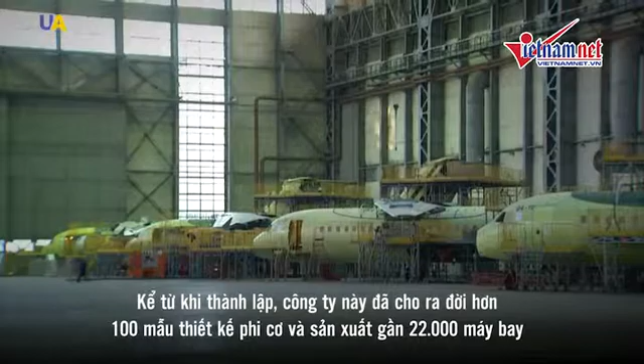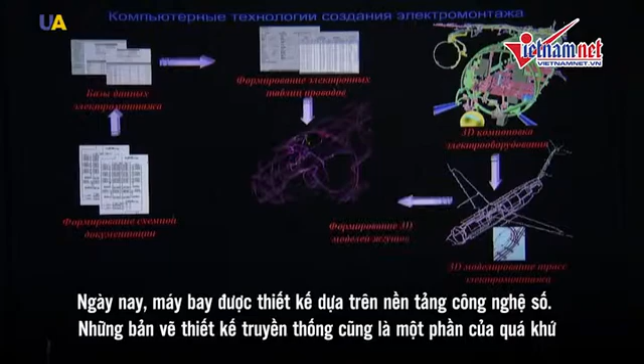Ukraine is among the leaders on the market with its unique concepts and innovations. Aircraft design and production is a field in which it's very difficult for other countries to compete with Ukraine. Nowadays, aircraft are designed using digital technologies. Traditional blueprints are a thing of the past.

Modern technologies speed up the aircraft development process and increase the quality of assembly. It makes it possible for engineers to check the parts early in the design stage. Using 3D modeling, it is possible to conduct virtual testing before any actual assembly.

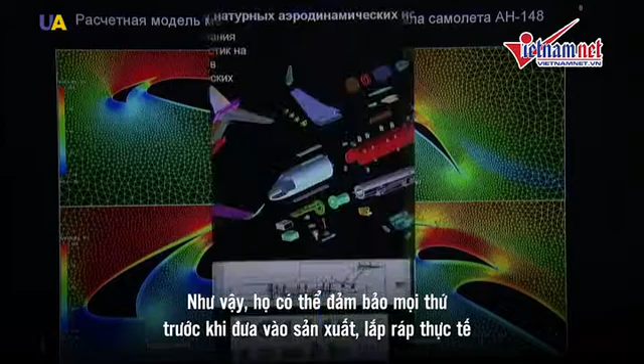Before the digital era, the process was much more complicated. All the blueprints were transferred to the molding room, where they prepared templates and produced parts. Tiny defects were common, but today the construction is precise down to the very last micron.

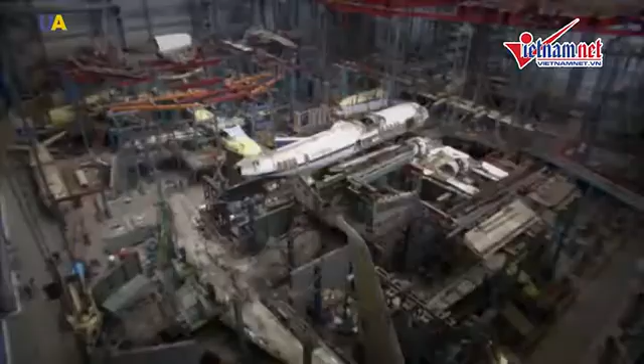Initially, a large portion of the components for Antonov planes were made in Russia. The process of import substitution in the Ukrainian aviation industry began only several years ago.

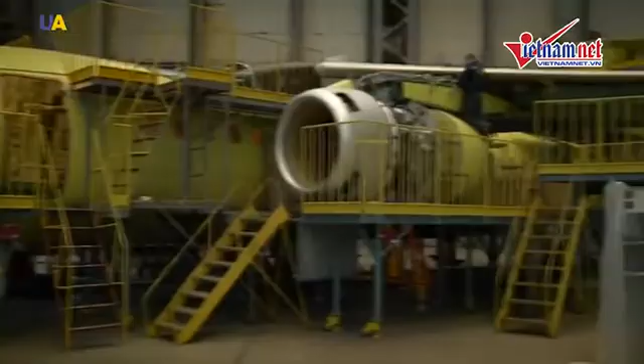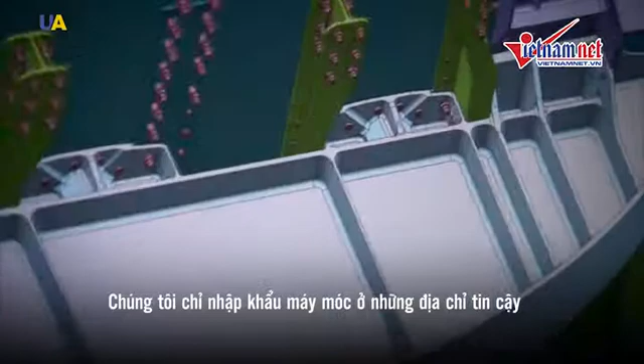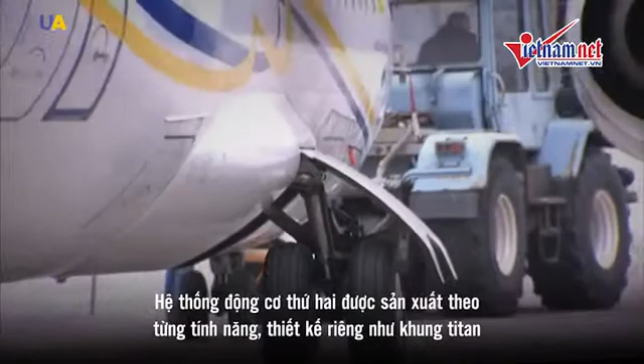The Zaporizhia-based company Ivchenko Progress produces reliable engines, as does Motor Sich. These are world-renowned companies, which produce very widely used advanced equipment. The secondary power system produced by Motor Sich features unique designs, like its titanium chassis.

There is also the Pivdenmash aerospace plant. The Electron Prilad, Ekran and Avionica plants produce a lot of state-of-the-art equipment that meets modern standards. At the same time, we buy tires and pilot seats made in England. We also buy from German companies like LITEF and Goodrich Lighting.

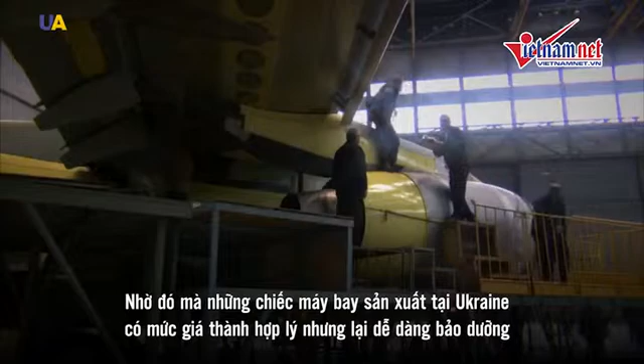We also buy equipment made in the US. Generally speaking, we buy the most modern equipment, and of course, we are not inferior to any competitors. Ukrainian aircraft are reliable, cost-effective and easy to maintain. They can also land on rough airstrips.

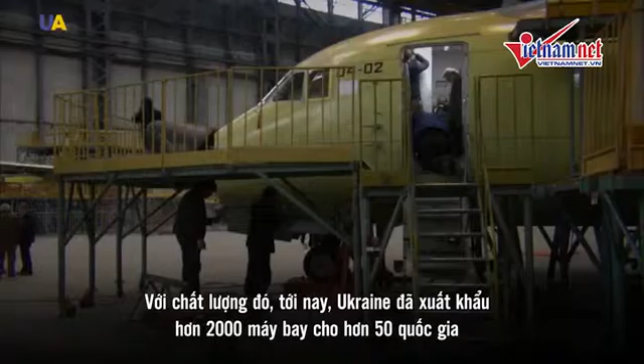Due to these qualities, about 2,000 Ukrainian aircraft have been exported to more than 50 countries around the world. A digital cockpit provides all the necessary information for the crew, which makes the aircraft very easy to manage.

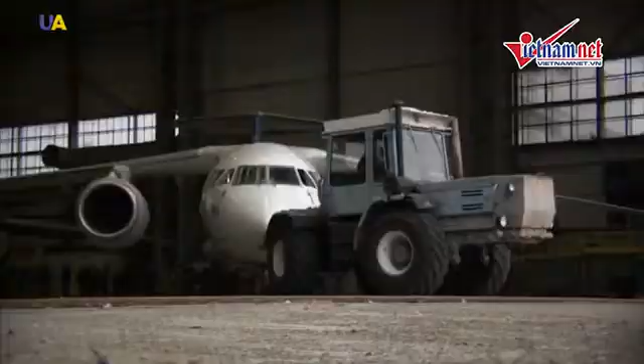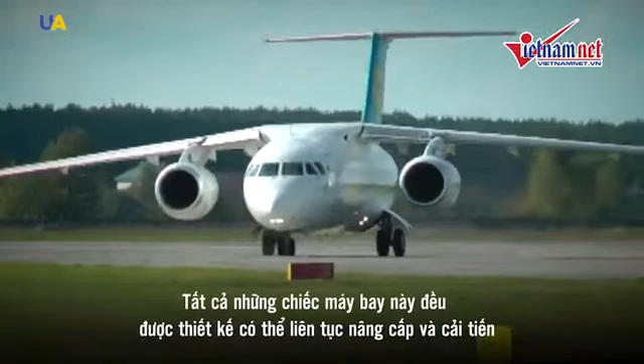Ukrainian designers have a solid niche on the civilian aircraft market. Antonov passenger aircraft comply with all international standards. The planes are designed so that they can be constantly upgraded and improved. This gives the Antonov aircraft manufacturer a leading edge over its competitors.

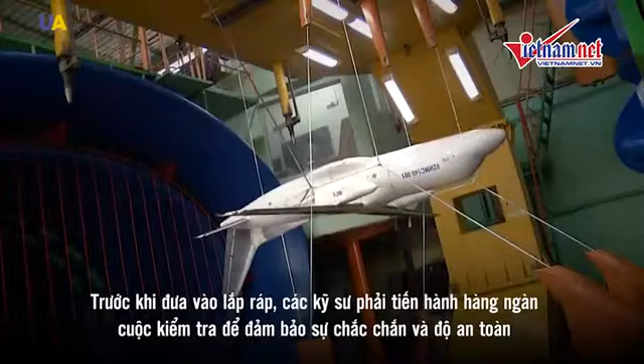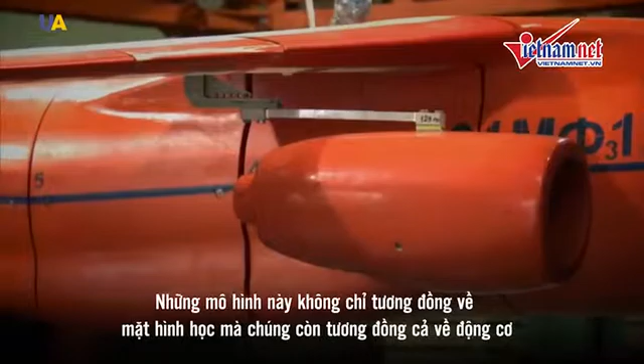Aircraft design is a difficult process that requires responsibility. Before assembling a plane, engineers must perform thousands of checks and make calculations in order to ensure reliability and safety. Reliability testing begins long before the actual construction of the aircraft. It begins at the design stage, and only then should everything be confirmed on an experimental level.

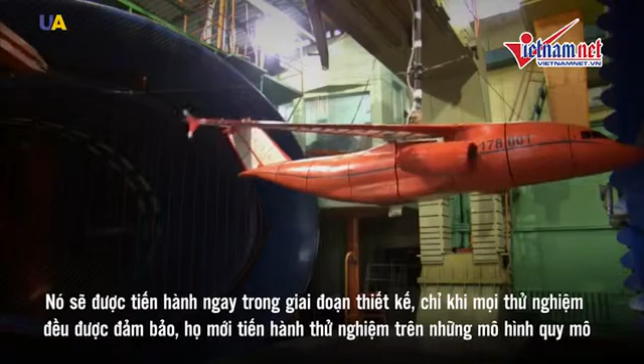The enterprise conducts testing on scale models. These models are not just geometrically the same, they are also dynamic. The flutter you see with this model actually happens to a real plane during flight, but we cannot see this in real life because the planes are flying at approximately 800 km per hour.

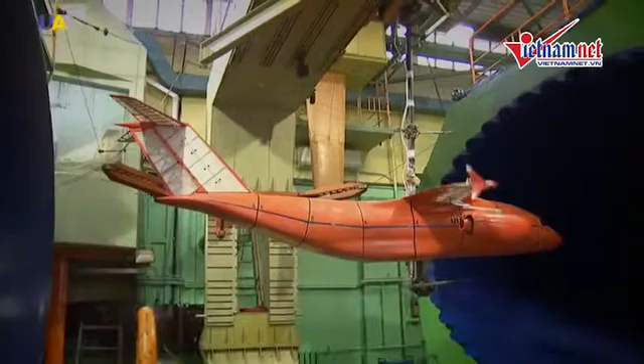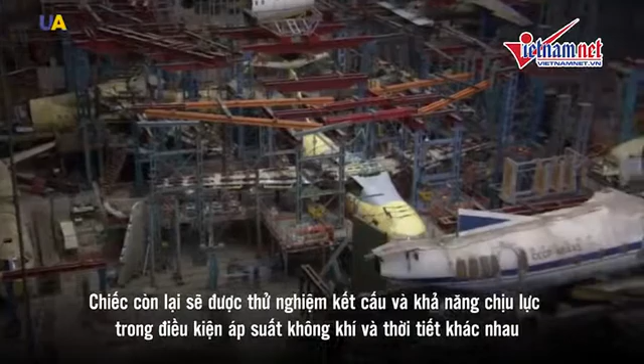But that's not all. After testing the model, engineers assemble two full-sized copies of the plane, one to undergo flight testing and the second one for structural and pressure testing in different atmospheric pressure and weather conditions. There are thousands of conditions and variations, all of which need to be tested.

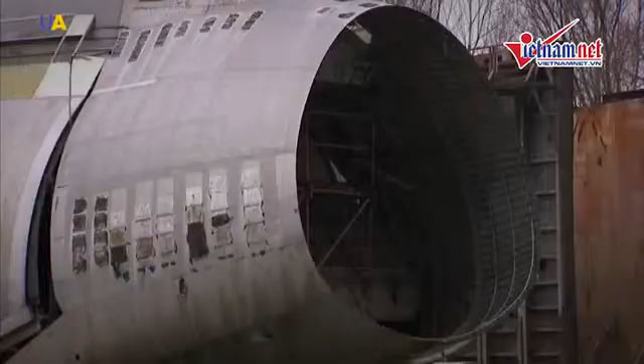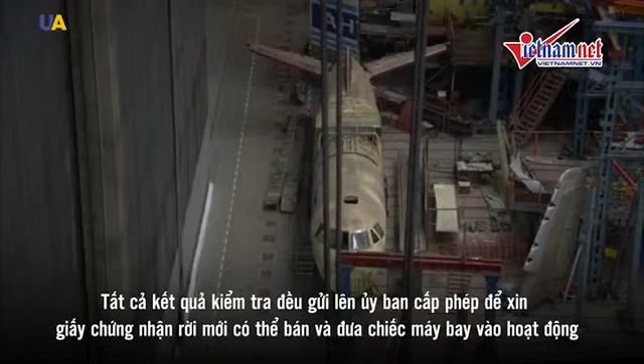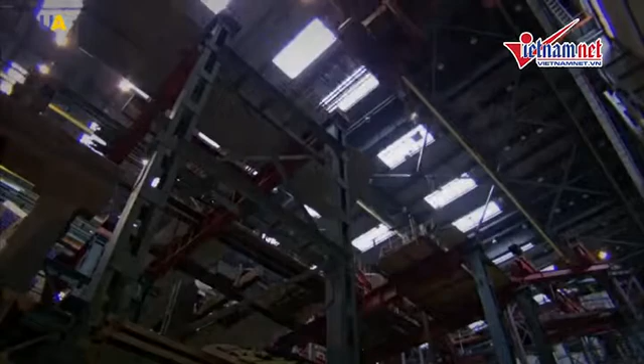All examinations are carried out on specially made stands, like this one. The aircraft has to complete 60,000 takeoffs, cruise speed flights and landings. All the test results are recorded and submitted to certification committees. The certificate allows the Ukrainian aircraft models to be sold and used worldwide, and then they fly.